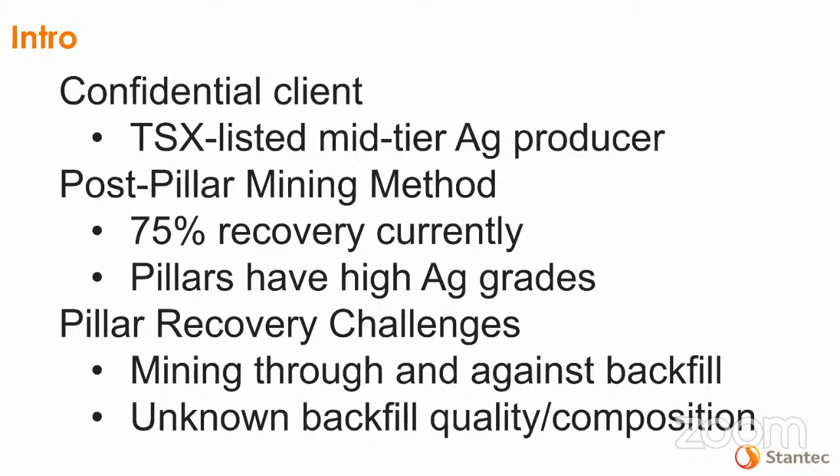Disclaimer, this is an engineering overview only. No financial information such as recovered tonnages and grades or costs and returns are disclosed, and as part of the original study, the sill pillar recovery is excluded. We're focusing on pillars within the excavation and not at boundary.

The location is, as I mentioned previously, client confidential, so somewhere within these boundaries. The client had been a client of Stantec's previously for several studies that I was involved with, including mining methods trade-offs and backfill engineering. And this had been the third study which I had performed for the client.

The historic mining method at this site is the post-pillar method, which is, for those of us in the audience not familiar, overhand cut and fill plus a room and pillar hybrid. And the mining areas are bounded by sill and exterior pillars. The sill pillar barriers allow multiple areas and levels to be mined at the same time, so you're creating these autonomous panels.

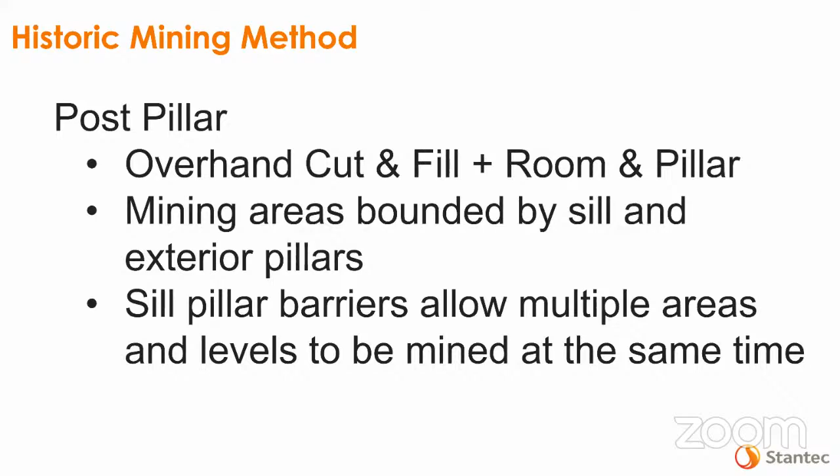Post-pillar mining method is overhand in this site. The development consists of 6-meter drifts, or calles as we pronounced it during the study, and then 6-meter crosscuts, or cámaras, as we pronounced it during the study, leaving 6-meter by 6-meter pillars. The pillar support is for the back when progressively working our way up using overhand methods or top slicing, as well as the sill pillar. The backfill provides a working platform for top slicing, and it stabilizes the pillars, or prevents them from unraveling due to higher concentrations of stress as the pillars develop in height.

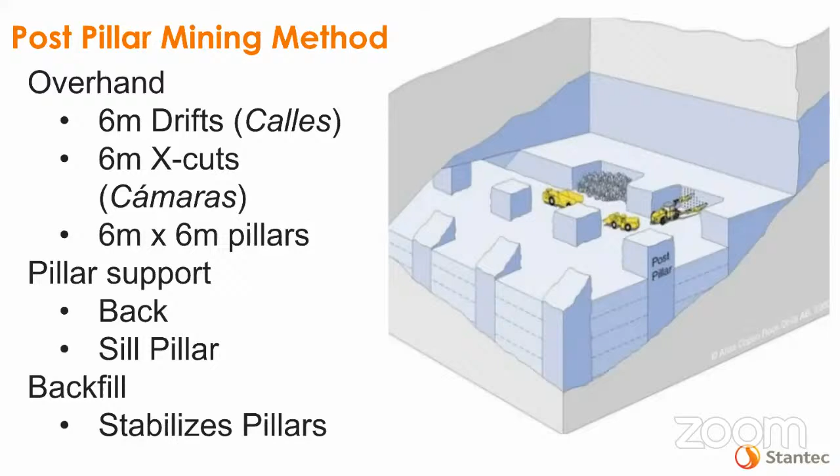The pillar mining approach for recovery of the high-grade pillars included long hole methods, mechanical cutting through raisebore, and then cut and fill had been considered, but was ruled out early due to the fact that the costs became prohibitive, and that became apparent at a very early stage.

So the study focused on the long hole and mechanical methods. The pillar access and challenges is mining new cámaras through pillars at the top level, mining through backfill, mining adjacent to backfill, leaving 24-meter sublevels, or with the vertical top cut dimension, that's going to be a 30-meter backfill exposure.

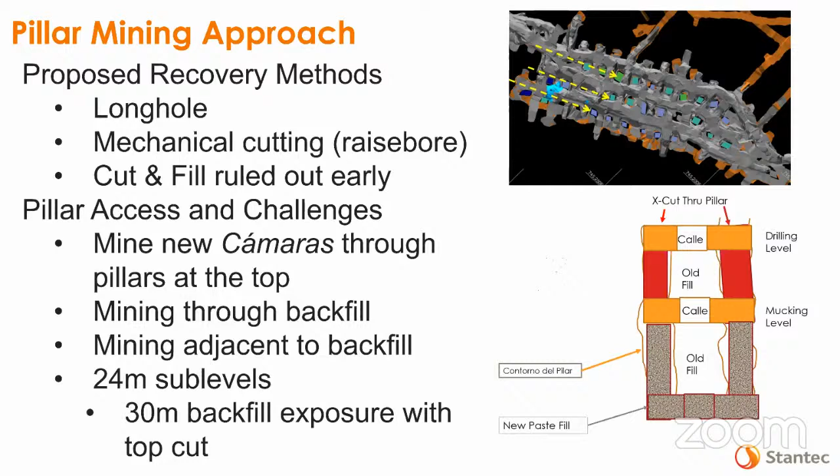So post-pillar mining and in-situ backfill. As I'd mentioned previously, the backfill quality is unknown. There are very few quality control records available. The backfill placement in the historic or previous calles and cámaras is inconsistent fill, mostly unconsolidated rock fill or loose rock, and then end dumps which were covered with cemented rock fill and jammed, or paste fill was placed on top of the unconsolidated rock fill, and then jamming occurred using dozers.

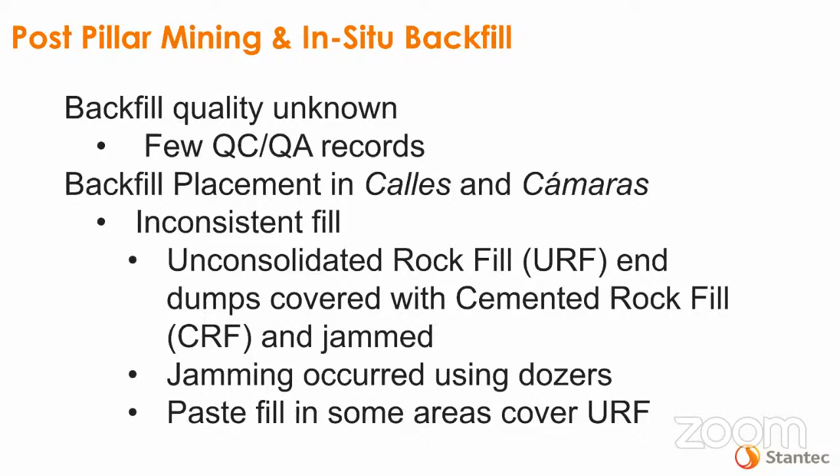So prior to pursuing either option for this topic for recovering the pillars, we need to know what type of backfill we're up against. The site investigations consist of probe drilling at the current mining level, the top level calle, and fan drilling, establishing drill stations between the remaining pillars, and then drilling holes to intercept the pillars and the backfill. Whatever core is recovered is logged for a RQD of the pillars and the backfill, as well as the contact zones between the remnant pillar and the historic backfill.

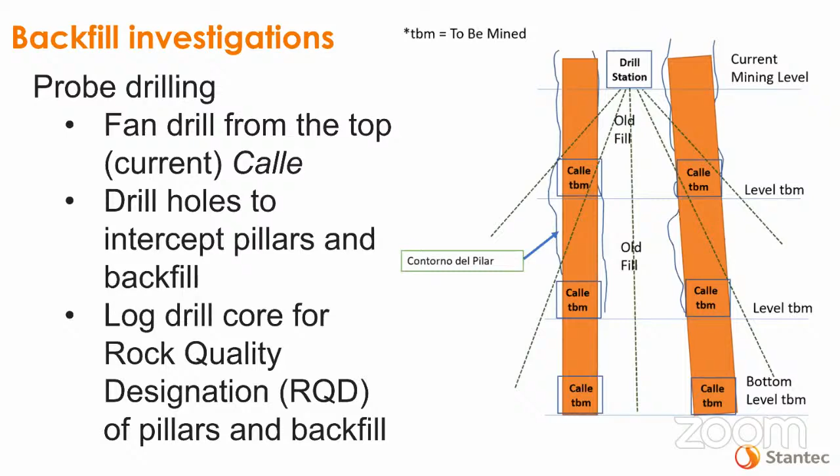Backfill strength is determined by selecting core for unconfined compressive strength testing of the paste, CRF, rock, any solid material at regular intervals, as well as examining and attempting to recover any core which would be compliant with testing specs from the backfill pillar contact zones.

Paste fill at the site typically achieves a 28-day unconfined compressive strength of 250 kilopascals for samples cast at the paste plant. That is based on what records we could locate for testing of any of the backfill. The in-situ unconfined compressive strength is typically, by virtue of rule of thumb and empirical data, 33% lower. So we're working with an assumed required backfill strength of 167 kilopascals. Remember that number. It's going to be discussed throughout the end of this presentation.

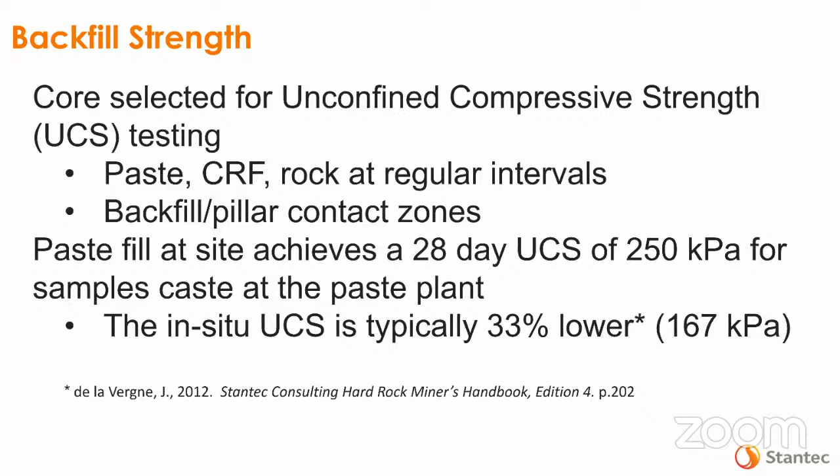Backfill strength requirements for single pillar mining, assuming adjacent cemented fill, that being paste or CRF. There is an arching effect, which is lateral stress due to backfill weight generating friction forces at the contact with adjacent backfill columns. It's present at single face exposures of a backfill column, say where you have backfill contacting the pillar on 3 sides and only one side exposed. It's assumed where the exposure height, in our case 30 meters, is significantly greater than the exposure length, which is 6 meters, the lateral dimension of the pillar.

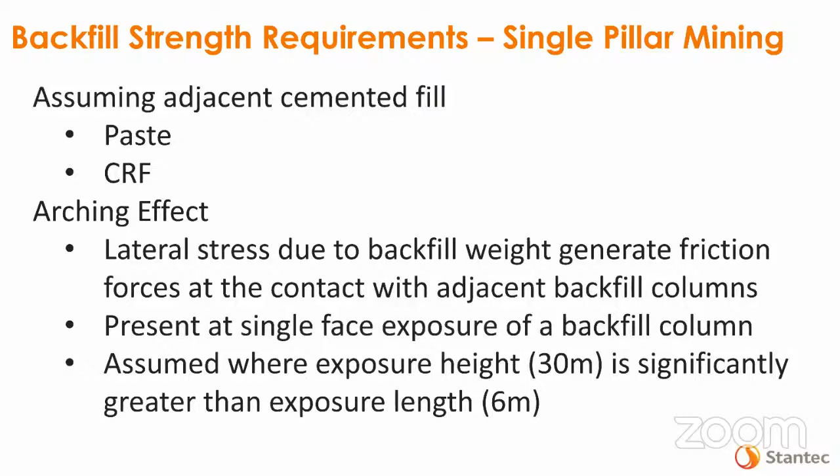So the arching effect, applying Mitchell's method to the 6 meter square pillars when the backfill UCS is 167 kilopascals at a factor of safety of 2, 13 vertical meters of pillar may be exposed. At a factor of safety of 1.5, the exposure height is virtually unlimited, and that just comes from Mitchell method calculations graphed to the right for your exposure height versus what your strength requirement is at your desired factor of safety.

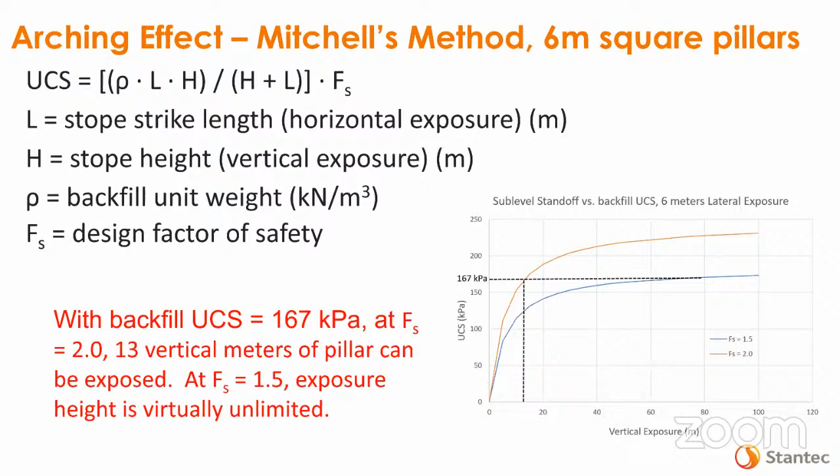Now your backfill strength requirements for long, say 30 meter strike pillars. Typically, there's a diminishing arching effect where the ratio of exposed backfill height to strike length is low, as we would see here. The self-supporting backfill is subject more to vertical loading. There's less support on the sidewalls due to the arching effect, or let's say negligible frictional boundary support. With backfill UCS at 1,200 kilopascals at a factor of safety of 2, 30 vertical meters of pillar can be exposed. At 1.5, the UCS is 900 kilopascal strength requirement for mining against a 30 meter vertical exposure.

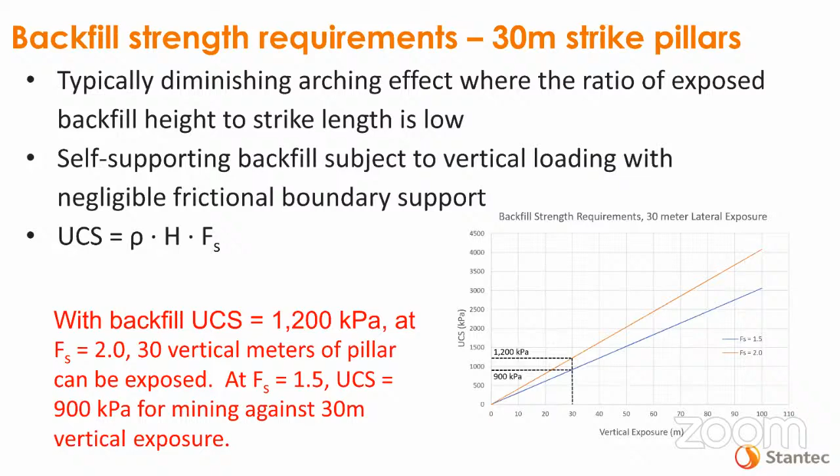Summary of those strength calculations: mining 6 meter pillars is more realistic at 30 meter vertical exposure. Look at the second row. When you have a strike length of 30 meters, your strength requirement of 900 to 1,200 kilopascals is significantly higher than doing a 6 meter strike length pillar. So your cement requirements are typically going to run around 5%, compared to backfill suitable for mining the 6 meter pillars, which runs around 3%, maybe 4%. Cement is one of the major costs for backfill, and backfilling can be up to 20% of your total mining costs. So anything that is conserved in cement is a huge cost saver.

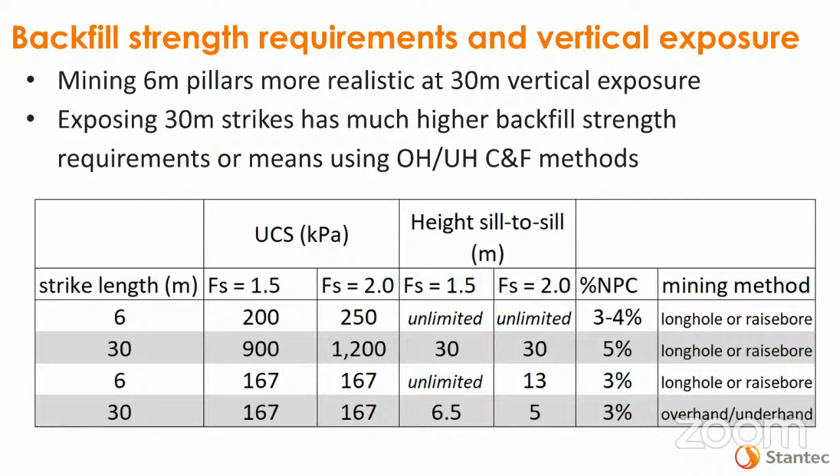Pillar mining methods: doing the mechanical mining or conventional drill and blast. We're looking at either long hole methods or for the mechanized mining using raisebore. Now you see that we're mining against backfill of unknown quality and consistency in each case. So it may be necessary to develop a barrier between what is being mined from the pillar versus the backfill, or not keeping the backfill exposed.

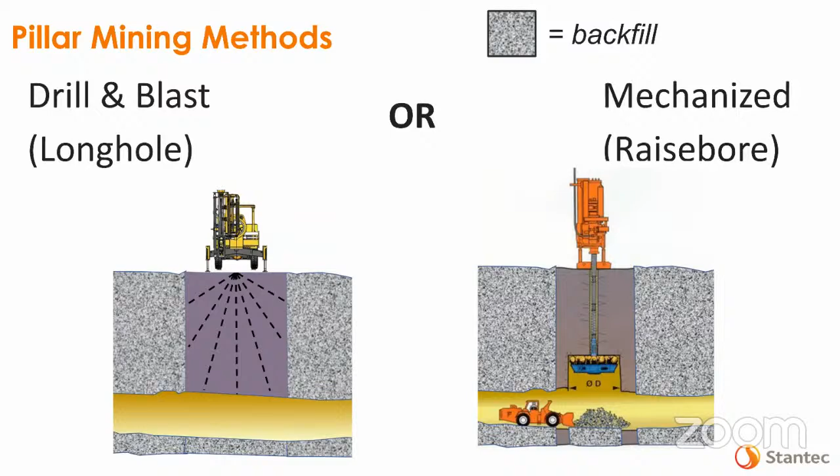Access drift support to do development through and adjacent to backfill to get to the drill stations for mining will most likely consist of shotcrete arches or rigid steel reinforced shotcrete and spiling. These photographs are not from site. They are taken from a vendor catalog for shotcrete arches.

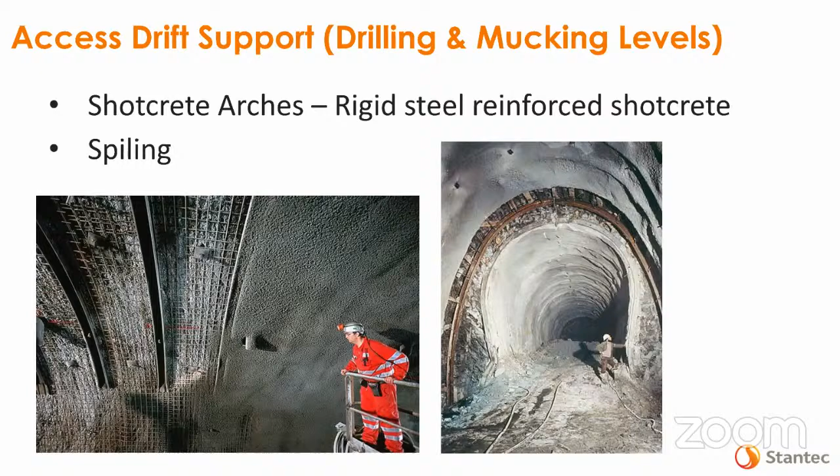For long hole pillar mining support, the risks and hazards of long hole methods are going up against loose, weak, and inconsistent or unpredictable backfill quality. The solution to that is a vertical spiling and grout barrier known as the pipe umbrella system. The vertical spiling can be installed conventionally or through self-drilling methods, and these pipes support or reinforce a grout curtain. So a barrier is created between the backfill of unknown quality and stability and the actual remnant pillar, which can then be mined through long hole methods, as illustrated in the previous diagram.

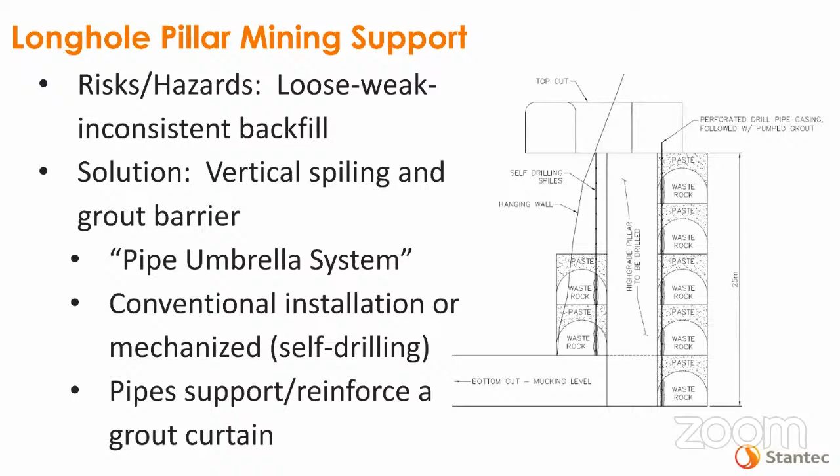For raisebore mining stability, the remnant pillar is sized versus a reamer bit for the raisebore, so that a shell, or as we pronounced it in the study, a scudo, is left behind in the pillar as a barrier against loose backfill.

This raise diameter is primarily determined by the raisebore rock quality. Raisebore rock quality is determined by logging core from the probe drilling, and it's used to determine what reamer bit thickness is needed to leave behind a scudo of a required thickness based on the rock quality and the level of risk tolerance.

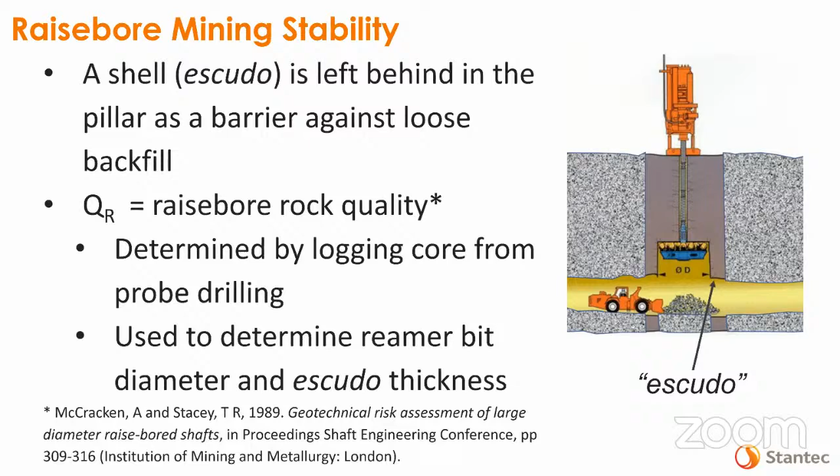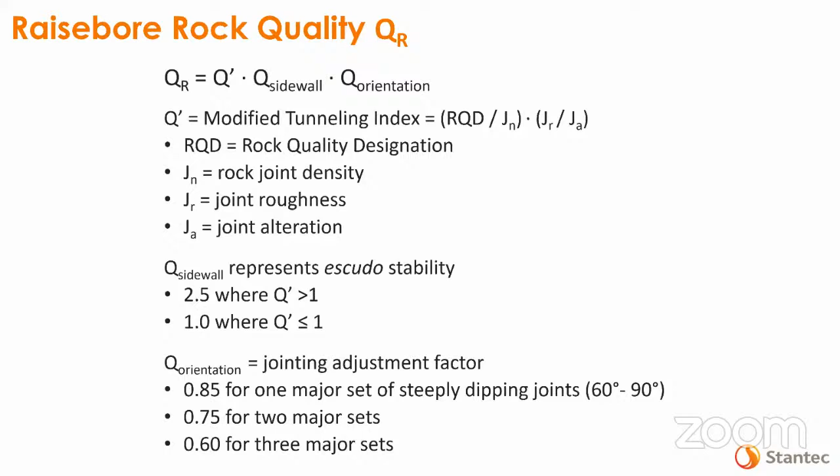Raisebore rock quality is the product of the modified tunneling index of NGI multiplied by terms accounting for the shell or escudo stability and the jointing adjustment factor. So that's your Q sub R, which is plotted versus your desired risk tolerance or reliability to give you your raise diameter or reamer bit sizing, so that you know how much of the pillar can be recovered, what is the appropriate escudo thickness to leave behind, so that you have a stable barrier between mining activities and loose backfill.

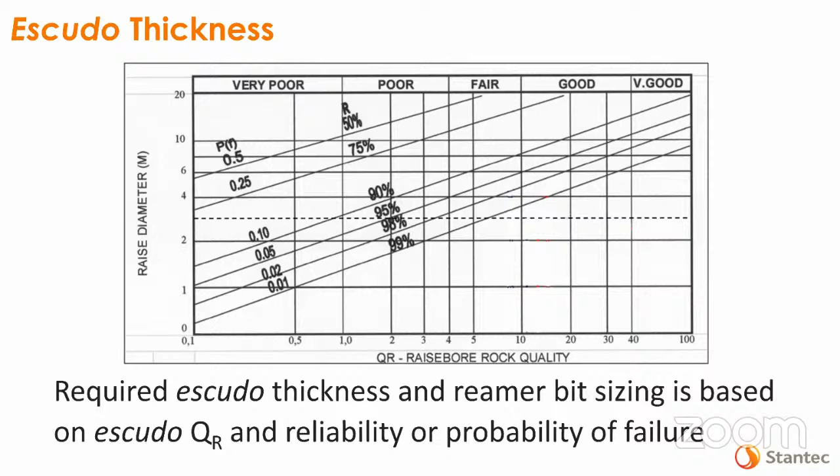So overall for the study, we discussed mostly the geomechanical factors here, which came into consideration, although that was a part of other factors which had been considered in the trade-off. I personally preferred the mechanized method, but it had been at a disadvantage in comparison to long hole methods.

That disadvantage was for cost and productivity. It would have cost much more to do the raise boring rather than installing the pipe umbrella system. And then there are issues with mucking out the raise bore cuttings versus how long that takes, or how many times you have to do that, versus using the long hole methods.

So taking everything into consideration for the pillar recovery in this trade-off, long hole methods were chosen rather than raise bore or cut and fill methods.

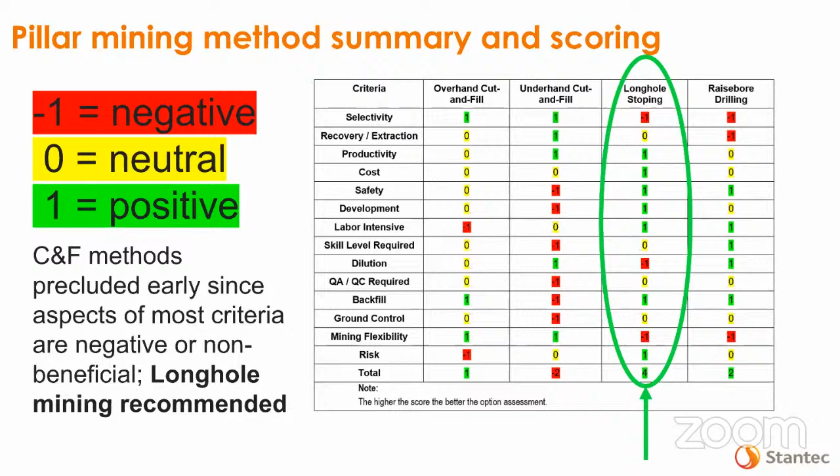So recommendations going forward, as we had included in the tech memo issued to the client: long hole mining method selection, blast 6-meter pillars individually, and the other criteria from the past slide favor long hole mining overall.

And probe drill before mining, so that we know what the strength and competence of the backfill is adjacent to pillars, as well as any potential escudo zone at the contact between the backfill and the remnant pillar. Core logging requirements are less objective for drill and blast than they are for the raisebore mining analysis.

And then when using long hole methods, use the pipe umbrella system where needed, where you encounter loose backfill or anticipate loose backfill, or where you anticipate the backfill to be, in this case, less than 200 to 250 kilopascals in strength.